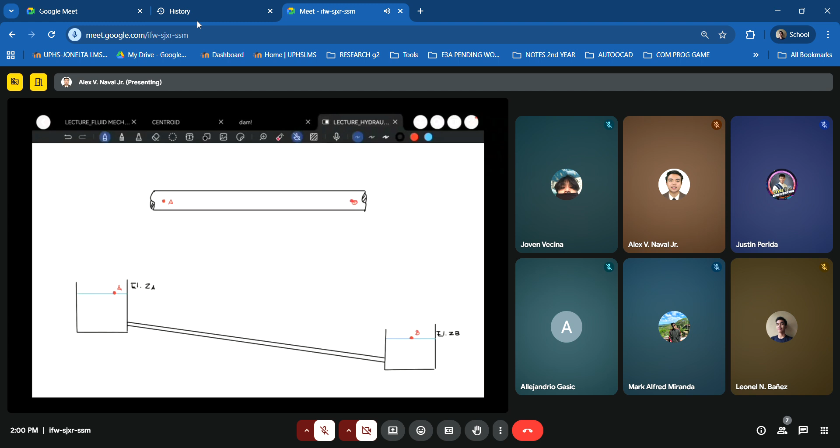Okay, solving reservoir problems. But before that, let's have a quick review of the concept of grade lines, no? Energy grade lines and hydraulic grade line.

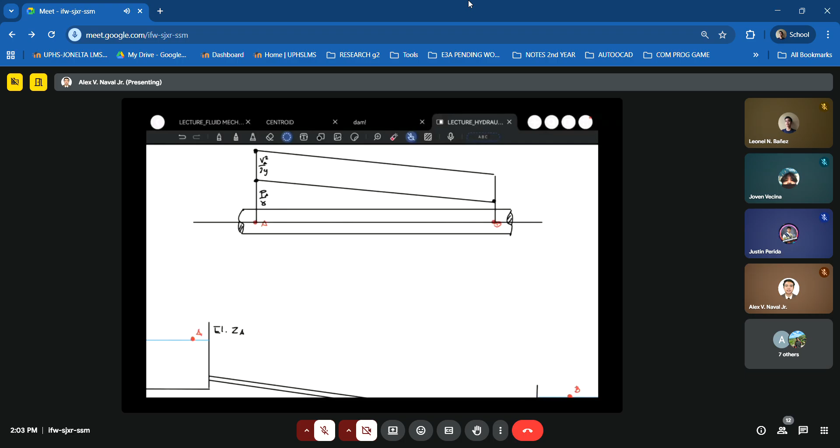So this will be our hydraulic grade line, and this one on top is your energy grade line. Okay, so this is VB squared over 2G, and this one is the pressure head at B over gamma, or the pressure head at point B.

So we calculate head loss here by means of the difference in total energy level. So if we locate that, up to this point, going here, this is your head loss. So that's what we call the head loss.

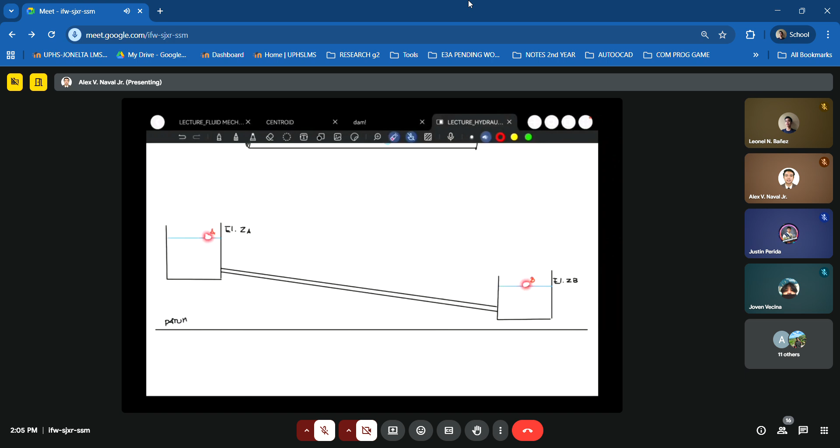Then at point A and point B, that is the elevation of the water surface for each reservoir. So this is reservoir A, this is reservoir B. So if you're going to draw the energy grade line as well as the hydraulic grade line, again,

we need the elevation head. So for the elevation head, the elevation for each point is given. Okay, so let's just connect it from the datum. So this is your ZA, while this one is your ZB.

Then next, we said to draw the energy grade line, we need the elevation head. So in pipes, there was no elevation head because our datum was at the center point of the pipe itself. Then aside from the elevation head, we need the pressure head and velocity head.

But you'll remember, when we talk about reservoirs, because a reservoir is exposed to atmospheric condition, since they're open, open surface, meaning our pressure head here is 0. So if we draw the hydraulic grade line, remember we said hydraulic grade line is just pressure head as well as the elevation head.

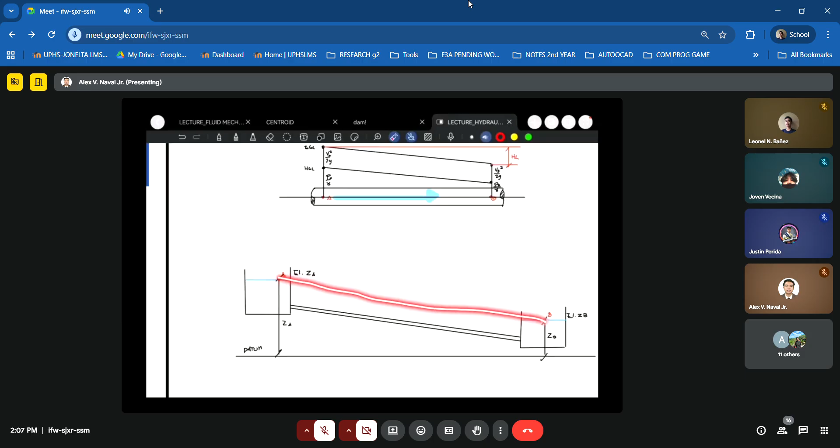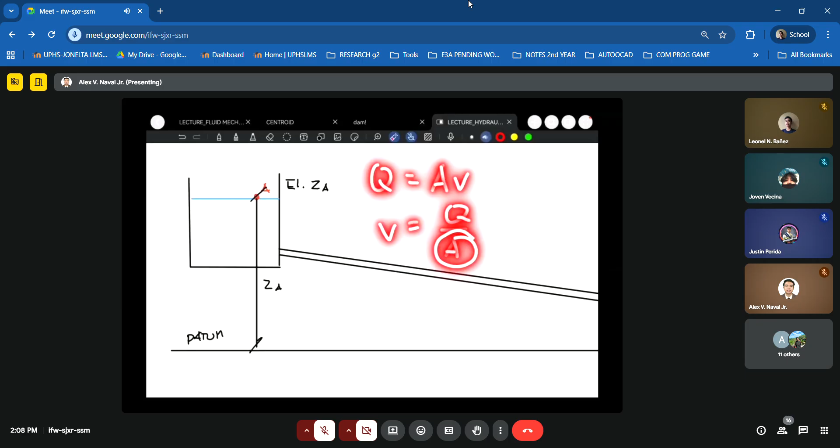So let's go back to the logic of the reservoir. Because this is a reservoir, the velocity head here is 0 because it's negligible. Again, the velocity for a reservoir measures how fast the water level drops. Because that has a large area, Q equals AV, V equals Q over A. Because your area is large, meaning your denominator is high, your velocity would be approximately equal to 0.

As well, if we observe that in real world observation, we don't really see the speed of the drop or rise of the water level or fluid level in reservoirs. So usually it takes time before we see the rise or change in fluid level in our reservoirs. So because of that, we consider velocity approximately equal to 0. So therefore, our velocity head is 0 as well.

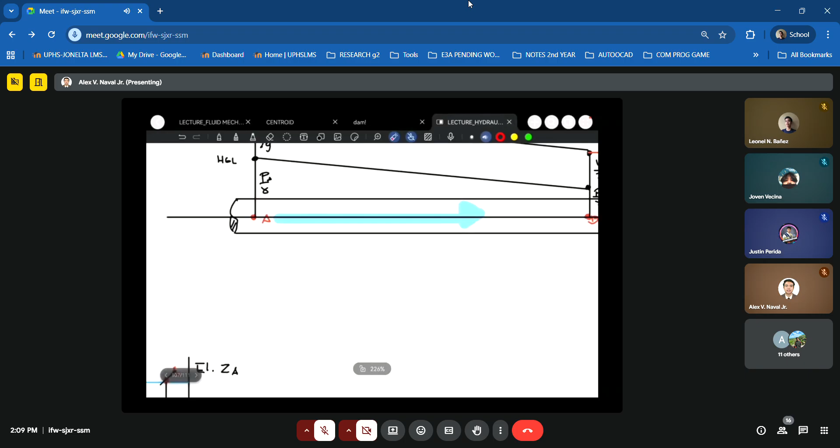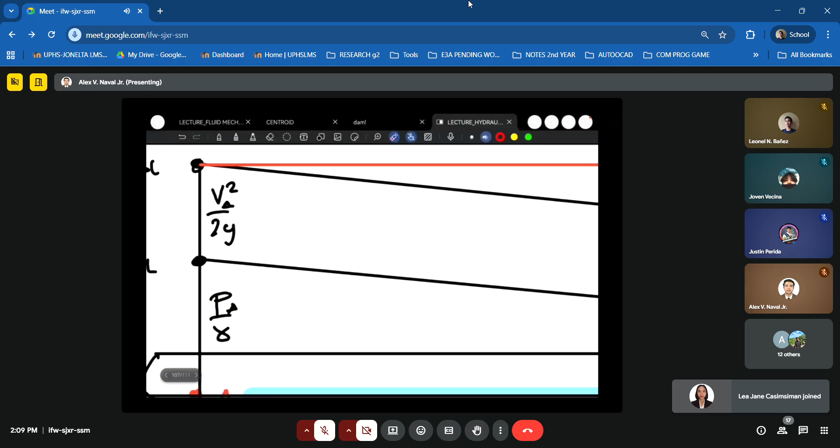Ang velocity mo, say, meron value pero maliit lang, say 0.0001. Sa velocity head, naka-square pa yan, so 0.0001 squared, lalong liliit yung value mo. Tapos i-divide mo pa sa 2G na 19.62. So almost close to 0 talaga ang ating velocity head.

So meaning by that, wala tayong velocity head sa ating grade lines. So kung i-drawing natin ngayon yung energy grade line, yung hydraulic grade line muna tayo. Di ba sabi natin, hydraulic grade line, ito yung point to point ng elevation head plus pressure head. But then again, wala tayong pressure head dito, so elevation head lang yung i-consider natin. Okay? So ito siya, this is our hydraulic grade line.

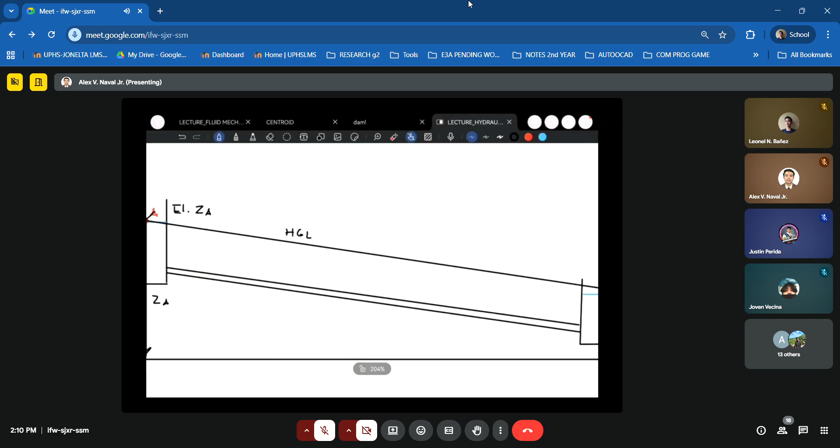Then as for the energy grade line, sabi natin, sukat lang tayo pataas ng velocity head, then nandun natin makikita yung energy grade line. But then again, for this one, sa mga reservoir problems natin, wala tayong velocity head. Therefore, ang HGL natin is also our energy grade line.

Ganun siya, no? So ngayon, locate naman natin ano yung head loss natin dito. So for the head loss, ito lang siya. So ano yung total head na nawala? That is our HL. Now pag-usapan naman natin kung paano kino-compute ang HL sa dalawang figure na to.

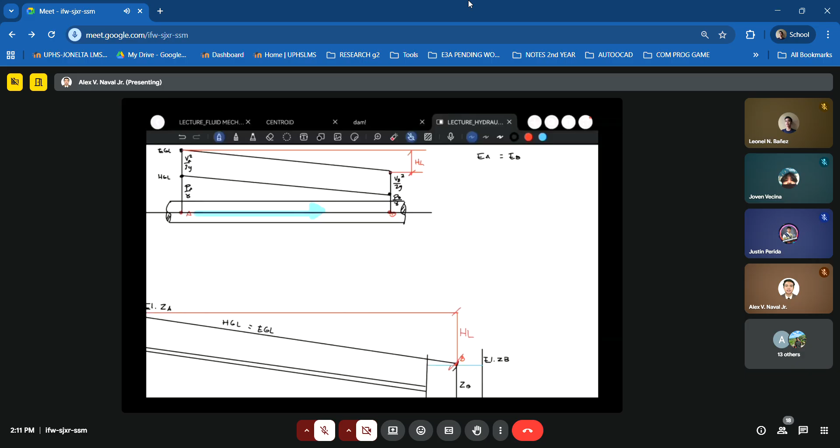Di ba, to solve for the HL, magsisimula tayo dito sa concept ng Bernoulli energy equation na kung saan ang energy at point A equals sa energy at point B. So that is VA squared over 2G plus PA over gamma plus ZA, which is 0 dahil tayo ay nasa datum na mismo yung center line. So equals velocity B squared over 2G for the velocity head at point B, pressure head at point B over gamma, then plus HL. Yun yung ginagawa nating equation for the energy equation.

Okay, so kung HL ang gusto nating isolve, so HL, we can obtain HL by laruin lang natin, so magiging VA squared minus VB squared over 2G, then plus PA minus PB over gamma. So that's how you solve for the total head loss for pipes, kasi mayroong pressure head at velocity head.

What if, di pa yan natin nasama dito si ZB? But then again, 0 rin yan.

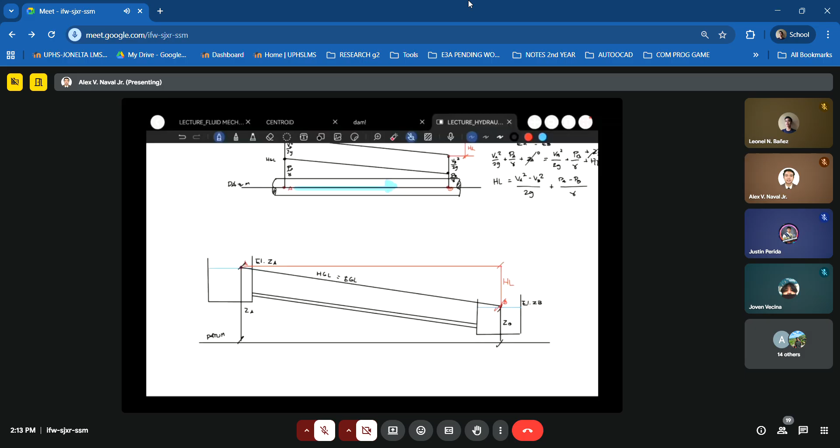Okay, so but what if sa reservoir naman tayo? Sa pipes kasi, meron tayong pressure head at velocity head. Sa reservoir naman, wala. Ang tanging meron tayo ay elevation head. Okay? So kung itatry natin isolve yung head loss sa reservoir A to reservoir B.

So again, let's start with the energy equation. Energy at point A equals energy at point B. Okay, so velocity head is 0. So VA squared over 2G, 0. Pressure head is 0 as well, plus ZA. So given ang elevation ng point A equals, may head loss tayo dito.

So dagdag natin dito yung head loss plus HL, kasi yung EB, energy at point B, ito lang yung tinutukoy doon. So last dito. Okay, so ito yung energy at point B, ito yung energy at point A. Okay, so energy at B naman, velocity is 0, as well as also the pressure head ng 0 rin. Then plus ZB, meron tayong elevation head for that.

Then plus HL. So meaning to say, to solve for HL, to solve for the head loss, this is simply the difference in elevation of point A and point B. So ganun siya sinosolve. Yung head loss sa mga reservoir problems is just a matter of the difference of elevation. Walang involved dito na velocity head at pressure head.

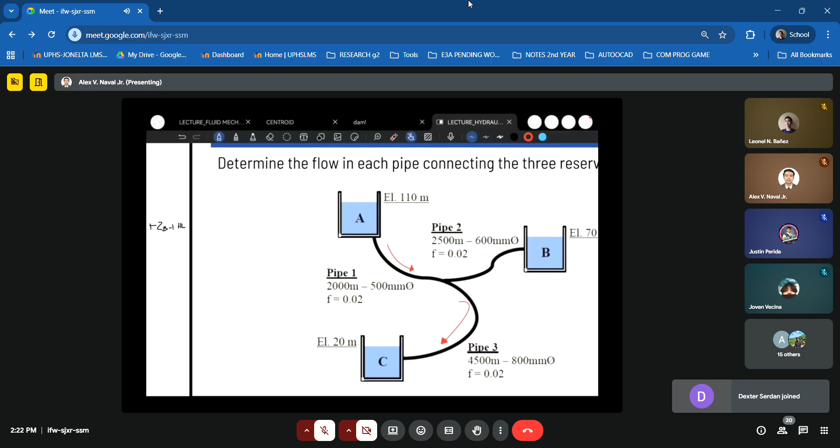Okay, so once we determine that flow, the direction of flow for Q1, the direction of flow for Q3, the discharge at pipe 3, next is to determine the direction of flow for pipe 2, whether it's going towards Reservoir B or going out of Reservoir B. So we're not sure, we can't tell because it's just in the middle.

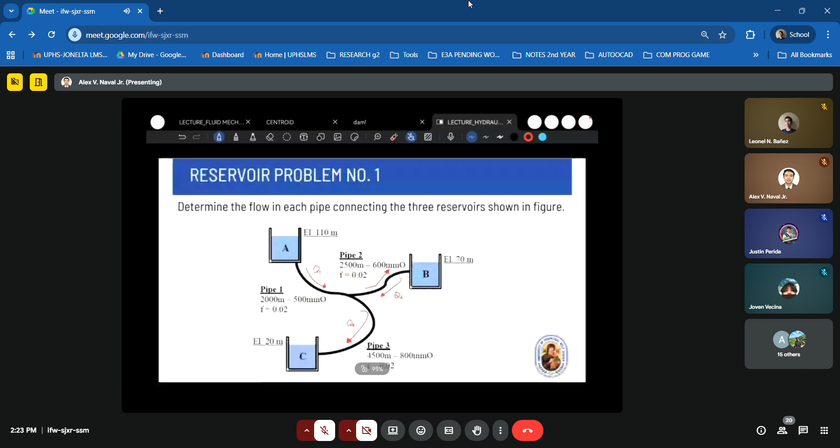Okay, so ang gagawin natin dito ay mag-a-assume. I-assume natin na walang discharge na nagaganap for Q2.

Para ma-determine ang direction ng flow ng Q2, i-assume natin na walang discharge sa Q2, meaning patay yung pipe natin dyan. Kung walang discharge dyan, ibig sabihin walang head loss, kasi nakadepende ang head loss sa discharge. Kung babalikan niyo yung mga formula, sa kaliwa may head loss, sa kanan may discharge.

Okay, so once siniro natin ang Q2, alamin natin ang Q1 at Q3 kung magbabalance out. So kapag ang lumabas ay mas malaki si Q1 compare sa Q3, ibig sabihin merong katulong si Q1.

Ay, baliktad pala. So kapag ang case natin is Q1 greater than Q3, kunwari ang discharge natin dito is 10 meter cube per second, tapos dito ay 5 meter cube per second. So malamang merong katulong si reservoir A, tatanggap si reservoir B, no? Kasi hindi pwedeng 10 meter cube per second doon, tapos dito ay 5 meter cube per second. Malamang dito ay merong 5 meter cube per second din, para sila ay mag-balance out. So ito ay magsusupply, ito ay tatanggap, ito rin ay tatanggap. That is when Q1 is greater than Q3.

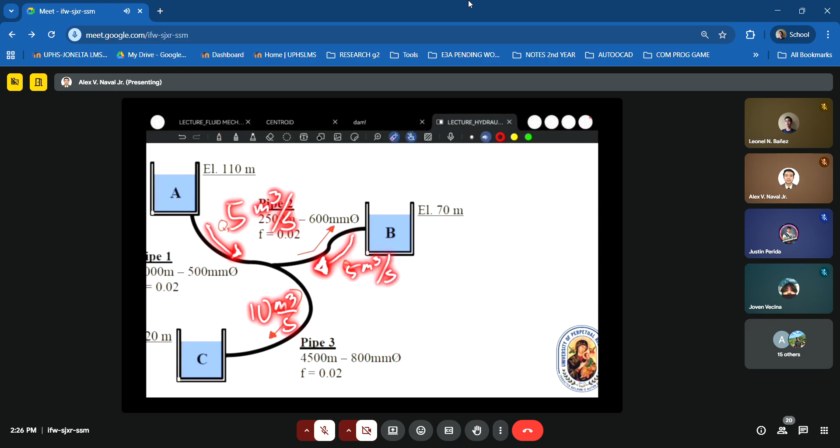Pero what if naman Q1 is less than Q3? Ang nangyayari doon, say for example 5 meter cube per second to, tapos ito ay 10 meter cube per second para sa Q3. So ano ibig sabihin nun? Hindi sapat yung 5 meter cube per second ng Q1, kaya kailangan niya pa ng tulong ng Q2 na another 5 meter cube per second, para maging 10 sa pagdating ng Q3.

Okay, so with that, kapag Q1 is less than Q3, ibig sabihin ang Q2 ay magsusupply. Kapag Q1 is greater than Q3, ibig sabihin ang Q2 ay tatanggap siya ng tubig papuntang Reservoir B from Reservoir A. So ganun yung logic dito. Kaya ang gagawin natin, i-assume natin na ito ay 0 at i-compare natin ano ang magiging discharge for Q1 and Q3 once siniro out natin ang Q2.

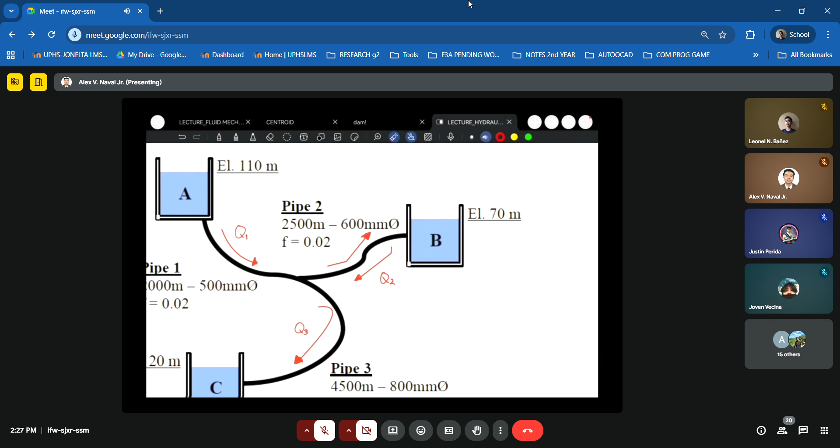So kapag ginawa nating 0 ang Q2, ibig sabihin magiging 0 ang head loss. Ano ibig sabihin nun? Kapag 0 ang head loss, ang mangyayari doon basically ay magpapantay yung energy grade line natin. Dito, yung head loss may value, kaya slanted or inclined yung ating energy grade line. Pero kapag ito ang energy grade line dito, ibig sabihin walang head loss, kasi horizontal line lang siya. So kung walang head loss, dapat pantay lang sila. Ang mangyayari doon, ang logic doon is that...

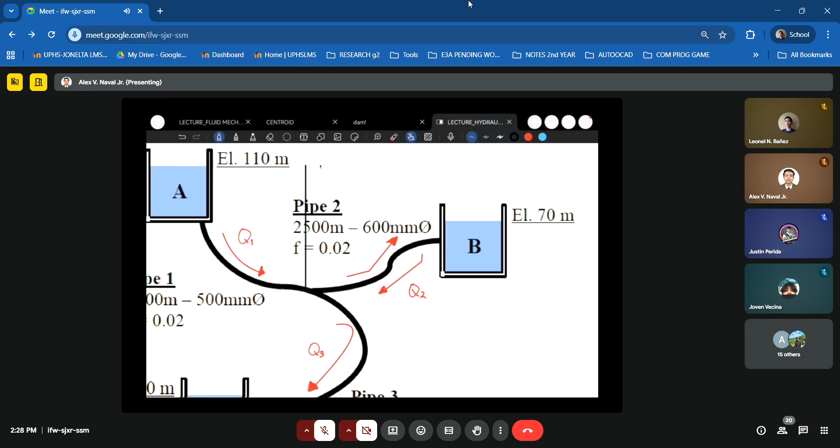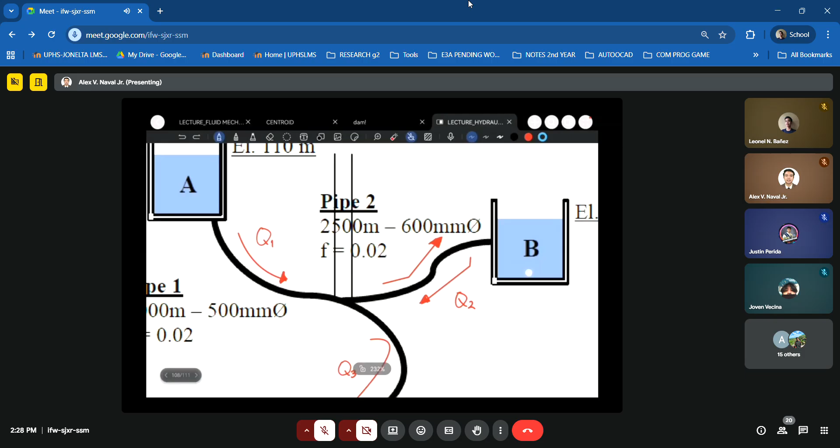Mag-i-imagine tayo dito ng piezometer, no? Maglalagay tayo dyan basically ng tubo dun sa junction. Imagine dun sa junction ng pipe 1, pipe 2, at pipe 3, naglagay tayo ng tubo. Dahil naglagay tayo dun ng tubo, ang tendency niyan ay merong tataas na tubig. At yun ay ipapantay lang natin sa reservoir B. Dahil sabi natin, 0 ang head loss from point B papunta sa junction, isi-0 natin or ipapantay natin ang ating energy level. Magiging ganito ang fluid level.

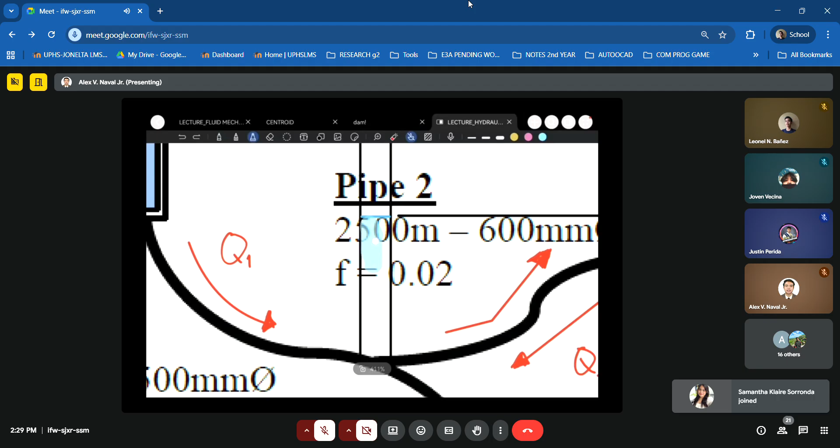Okay, so ayan yung concept mo. Ginawa natin yan para makuha ang Q1 at Q3. So paano natin yun kukunin? Ayusin lang muna natin yung drawing.

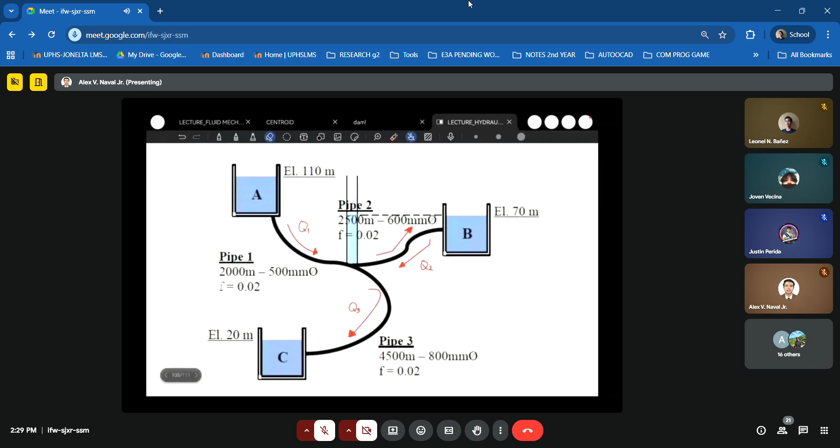Okay, so kunin natin yung Q1 at Q3, at makukuha natin ang Q1 at Q3 by relating the head loss for pipe 1 at head loss for pipe 3. So again, nag-assume tayo na pantay lang ang level dito sa junction, pantay sa elevation ng reservoir B. So solve natin, or identifying muna natin yung mga head losses natin.

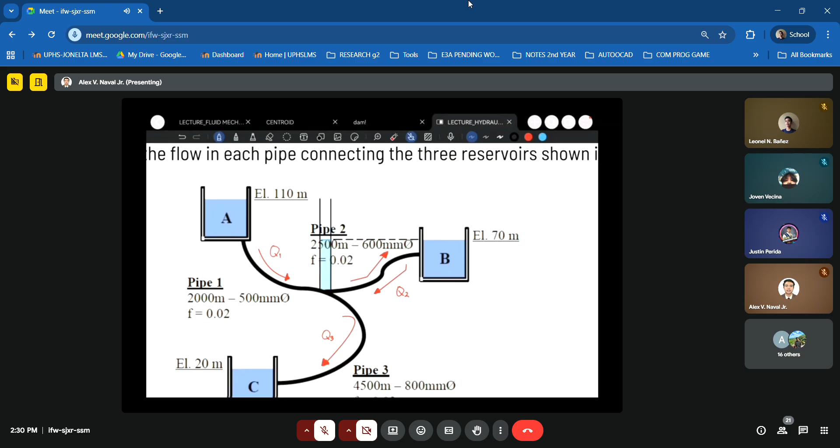So based sa figure, kung i-connect natin si point A sa junction, kung i-drawing natin yung energy grade line para dito, pag ganito lang siya, pag ganyan lang siya. Kasi nga, pinag-uusapan na lang natin dito ay elevation head, for reservoir problem. Walang involved na pressure head at velocity head. So connect the dots na lang sa water surface ang ating energy grade line.

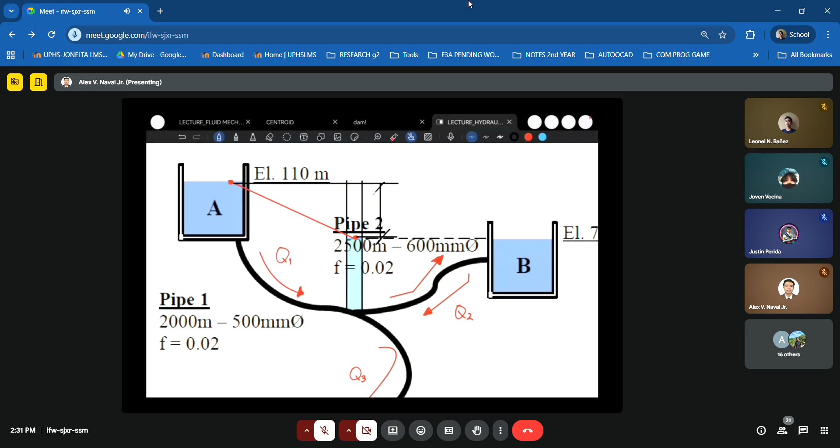So to solve for the head loss of this one, sukatin lang natin yung basically yung difference ng elevation na ito. This is for pipe 1 papunta sa junction. Ang difference nila is the head loss. Ang head loss dito, tawagin natin HF1. HF1 which is equal sa difference in elevation ng point A at ng junction. So sabi natin, ang elevation ng junction ay pantay lang sa reservoir B. So...

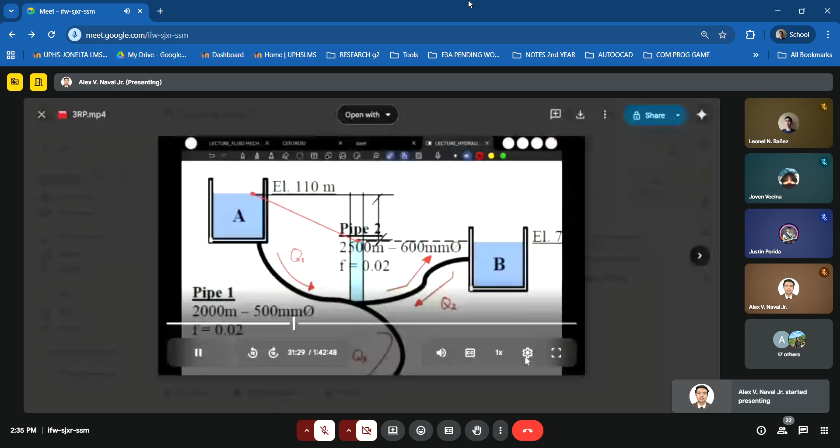This is for pipe 1 papunta sa junction. Ang difference nila is the head loss. Ang head loss dito, tawagin natin HF1. HF1 which is equal sa difference in elevation ng point A at ng junction. Sabi natin, ang elevation ng junction ay pantay lang sa reservoir B. So that is difference ng 110 minus 70. So that is 40 meters.

Okay, so next, HF3 naman ang pag-usapan natin. So kung i-connect ulit natin ang energy grade line, drawing natin, magiging ganito siya, no? Kung the water surface level ng reservoir C papunta sa water surface level ng junction.

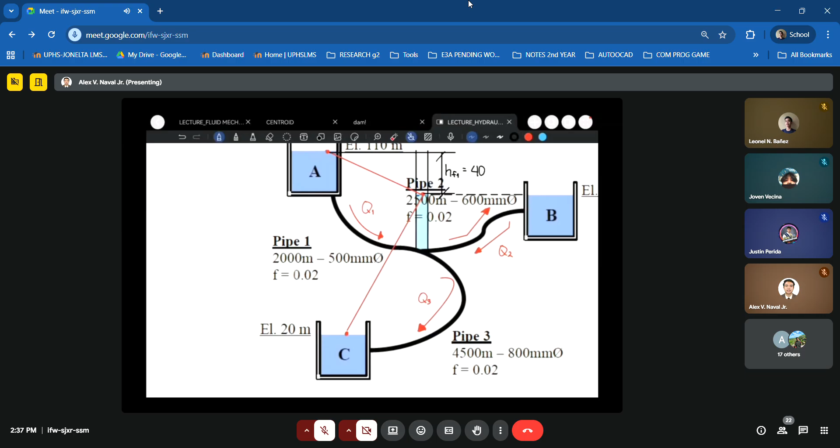Okay, at ang ating head loss dito, mula junction papunta sa reservoir C, tatawagin natin yung HF3. HF3 na equal sa difference in elevation ulit ng ating junction at ng reservoir C.

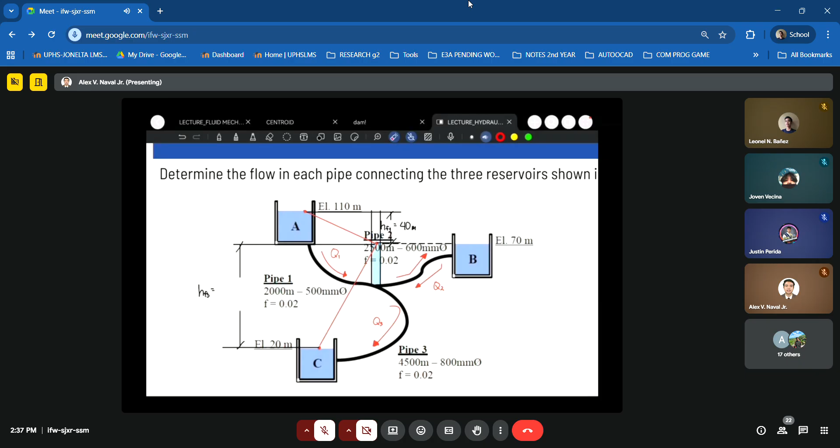Okay, so kung ang ating junction ay may elevation same sa B which is 70, at ang reservoir C natin ay may elevation 20 meters. So ang head loss natin dito is simply 70 minus 20 lamang or 50 meters. This is 50 meters.

Okay, so if that's the case, alam na natin ang HF1 at HF3. Now we can now solve for the value of Q1 at Q3 gamit ang HF1, or ang formula muna natin ng Darcy-Weisbach na equation. So that is HL equals 0.0826 FL Q squared over D raised to 5.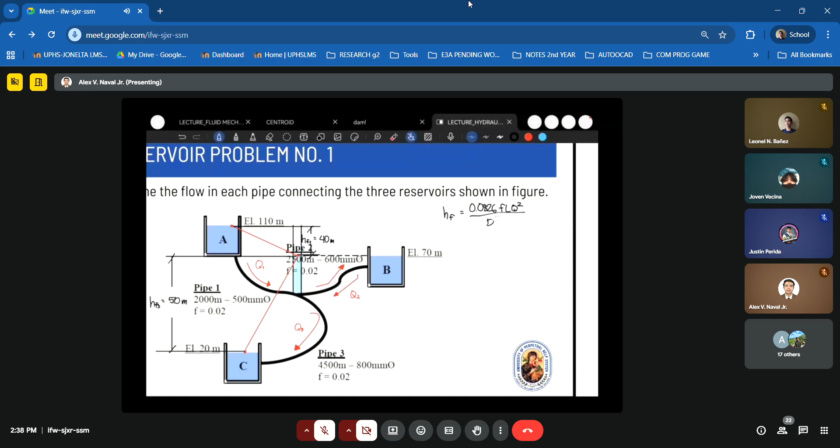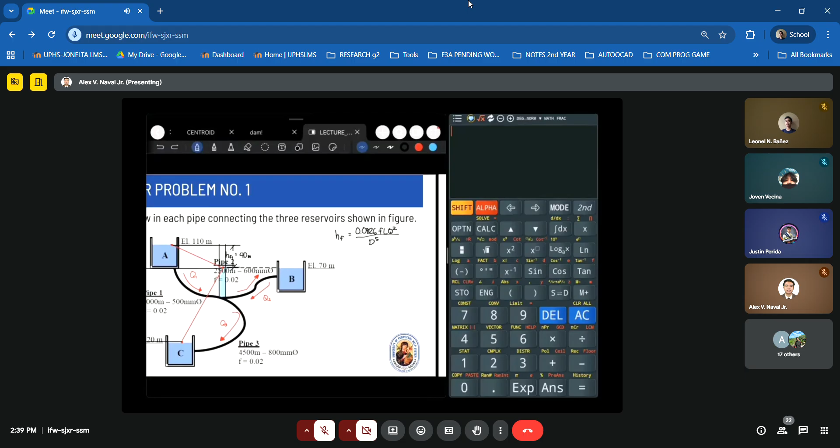So kung HF1 ang pinag-uusapan natin, equal na lang yan sa irerekta na natin. Sige na, sulat ko na. HF1 equals 0.0826. Yung F natin ay 0.02. And ang length ng pipe 1 natin, ang length ng pipe 1 is 2,000.

2,000, then Q1 squared ay hindi natin alam. And for the diameter is 500 mm or 0.5 meters. Then sabi natin ang HF1 natin ay equal sa 40 meters.

So with this equation, masasolve natin ang Q1. So 40 equals 0.0826 times 0.02 times 2,000 times Q1 squared over, yung raised to 5, nalimutan ko, 0.5 raised to 5.

So ang value ng ating Q1 would be equal sa 0.615 cubic meter.

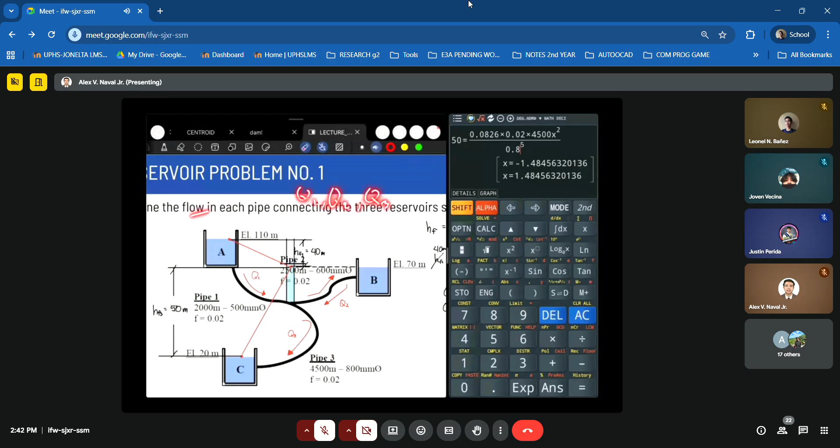Kasi ang tanong nga natin dito, di ba? Determine the flow in each pipe. So Q1, Q2, and Q3 yung gusto nating makuha. But then again, itong Q1 at Q3 ay hindi pa final answer kasi ginagamit pa lang natin to determine the case kung si reservoir B ba ay tumatanggap or nagsusupply.

Okay, so based dito sa nakuha nating values, then Q2 is 0. Nalaman natin na Q1 is less than Q3. So ano ibig sabihin nun? Kung may 0.615 dito, imagine mo para mas make sense. Kung dito ay 0.615 at sa kabila ay 1.48. Ito ay 0.615. Hindi equal, no?

Hindi equal yung binibigay ng Q1 para matanggap ni Q3 yung 1.48 na discharge. Kung hindi balanse, ibig sabihin may katulong dapat si pipe 1 na magbibigay ng discharge para ma-achieve ni pipe 3 yung 1.48 at ito 0.615. So basically ito 1.48 minus 0.615 dapat, no?

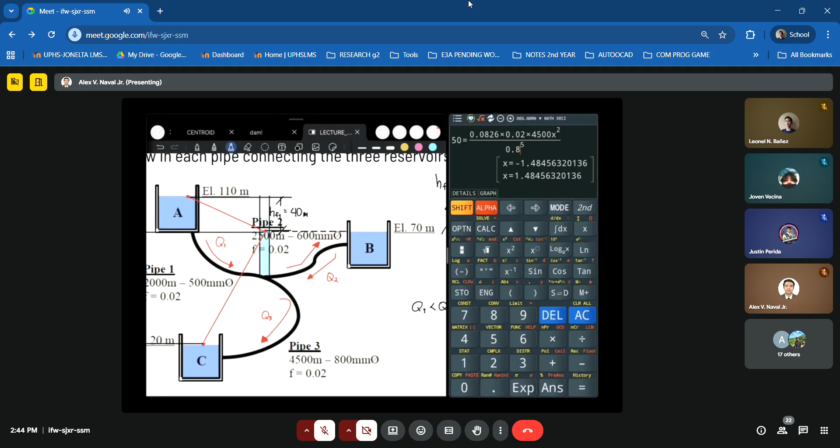Ayun sana, pero again, hindi pa yun yung final answer kasi nag-assume pa lang tayo dito. Ang goal lang nun is to determine the type of flow, no? The direction of flow. Dahil nga based dito sa conclusion natin, Q1 is less than Q3, ibig sabihin may katulong si pipe 1 para mag-supply kay reservoir C, and that is reservoir B. So ito yung tamang flow natin.

Nagsusupply din si reservoir B. Okay, so dahil alam na natin na si reservoir B ay magsusupply, let's now solve for the proper answer, no? Proper answers ng Q1, Q2, and Q3.

Okay, so dito tayo using same figure. I-drawing na ulit natin yung tubo sa junction or the piezometer. Okay, ulit tayo dito ng tubo sa ating junction. Importante na nilalagay natin ito, no? Kasi dito tayo nagsusukat ng head loss sa junction, no? Okay, so sabi natin ang flow would be in this manner, no? Yung Q1 ay pag ganito. This is your Q1 and this is your Q3.

Okay, so for Q2 naman, the discharge at pipe 2, sabi natin, palayo sa reservoir B, no? Kasi siya ay magsusupply. So, this will be our Q2.

At based dito, sa logic na to, madedetermine natin kung nasaan banda ang level ng fluid dito sa tube sa junction natin or sa piezometer natin. Okay, so sabi natin, yung logic kanina, kapag nagsusupply, mas mataas ang energy compare dun sa sinusuplayan. Now, based dito sa figure, si reservoir B ay nagsusupply sa junction na ito. So, ano ibig sabihin nun? Dapat yung fluid dito sa junction is mas mababa compare sa reservoir B.

So, with that, let's draw the estimated na fluid level. So, sabihin natin nandito banda, mas mababa siya compare sa reservoir B. Okay?

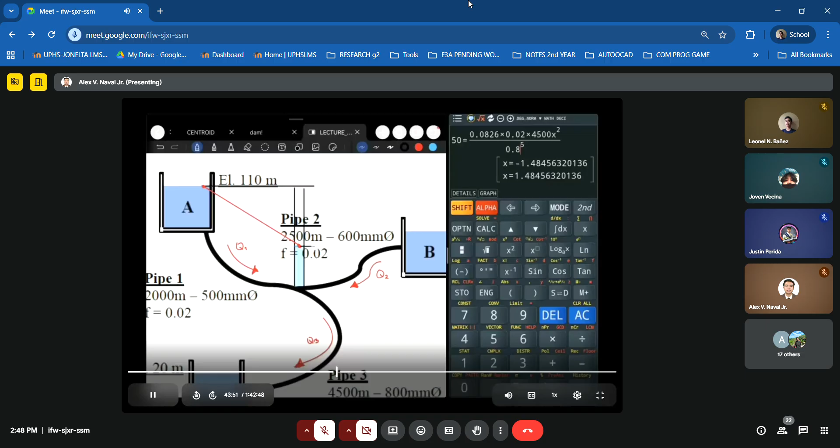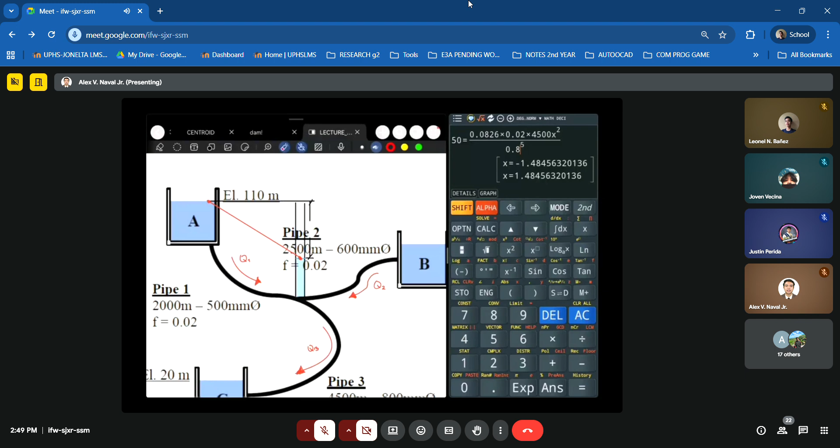So, eto na ang ating head loss for pipe 1, and that is equal to what? So, kung kanina sinukat natin ang head loss 110 minus 70 kasi ito ay pantay lang ng reservoir B. Ngayon, hindi na ganoon, no? Siya ay bumaba na. So, mas mababa na siya sa 70 meters. Yung elevation natin dito, well, hindi natin alam, no? So, hindi tayo makakapag-direkta na 110 minus the elevation of this one. So, since hindi natin alam yun, tawagin na lang natin x yan, no?

So, sabihin na lang natin ito ay x. Okay? So, HF1 natin bale ay equal sa x. Now, let's solve for HF2 naman based sa figure. So, again, connect the dots.

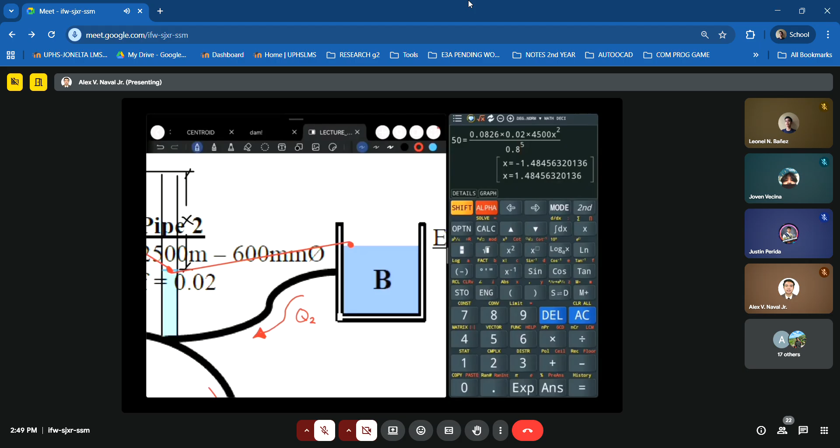So, with that, malalaman natin ang HF2 would be this one. Yung difference in elevation ng reservoir B papunta sa elevation ng junction.

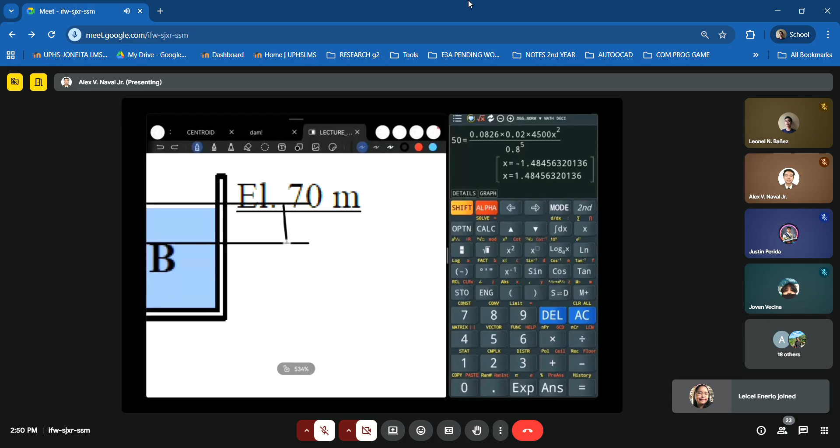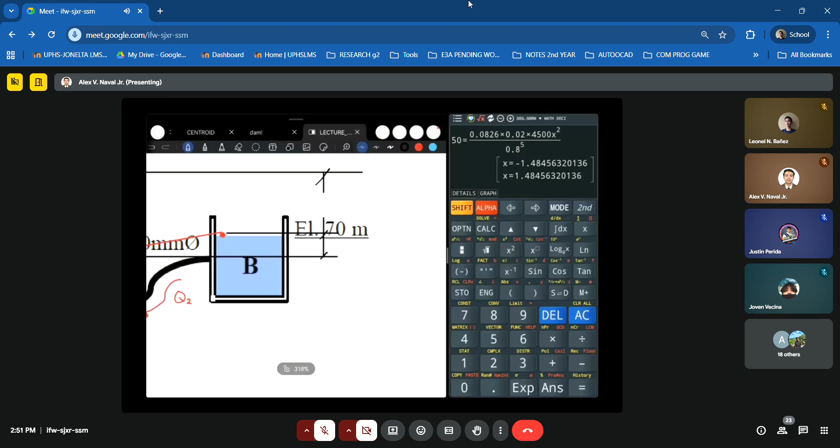Okay, so paano natin susukatin yan? So, if this is x, ilan to? Okay, so let's use the elevation, no? So sabi natin, kung titingnan natin yung elevation, kung ito ay 110 at itong nasa baba niya ay 70 ang elevation, ibig sabihin, masusukat natin kung ilan to. This is simply 110 minus 70. So this is 40 meters, no?

Okay, so nagets ba yan? Kung ito ay 110, ito ay 70. So this is 40 meters. Pero again, ang gusto natin is ito, no? Pero tandaan ninyo, meron tayong sukat dito and that is x. So what do we mean by that? X equals 40 minus HF2. So, ang HF2 natin would be equal sa 40 minus X.

Okay? So, X minus 40 pala. So, bali, base dito, no? Ang X natin equals sa 40 plus HF2. Kasi ito si HF2, no? Itong X equal dito sa 40 plus HF2. So, ibig sabihin, ang HF2 natin would be X minus 40. Okay, so X minus 40. Palitan na lang natin itong X minus 40.

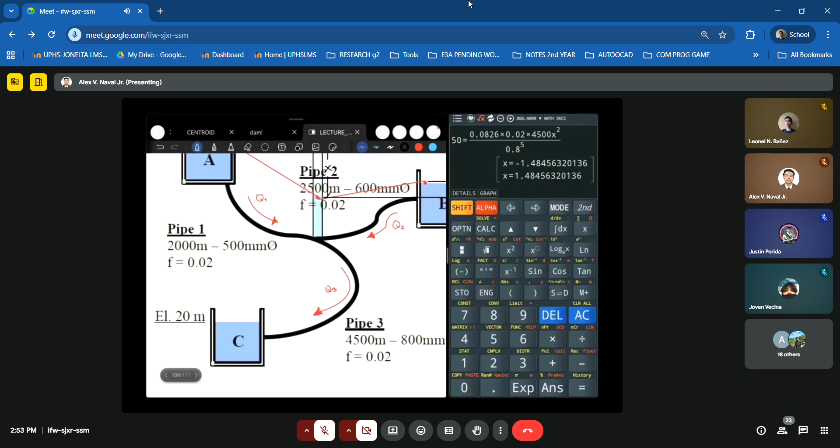Okay, so next naman is HF3. HF3, ganun ulit, connect the dots. Then, sukatin natin ang difference in elevation. Difference ng elevation, this one. Elevation ng junction minus elevation 20 meters ng Reservoir C. Okay, so paano natin yan i-define? Okay, so tingnan natin yung meron tayong given, no?

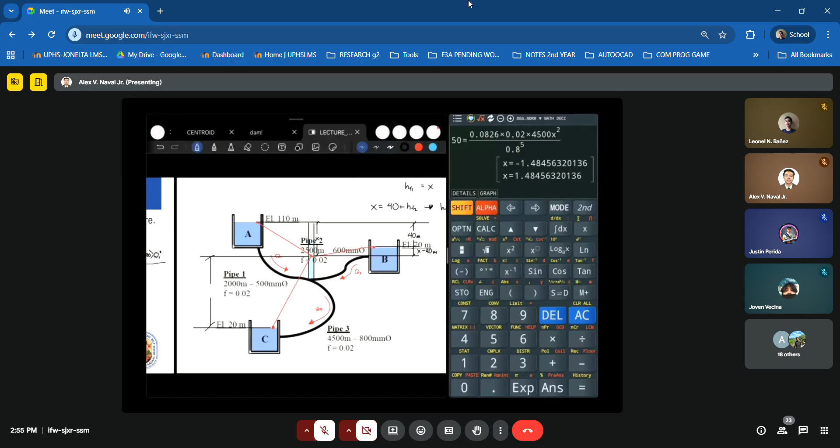So sabi natin ito ay 110, sabi natin ito ay 20. So basically ito ay equal sa 110 minus 20, which is 90. Okay, so tandaan nyo, kung ito ay 90 at ito ay x, meaning bawasin lang natin ang x sa 90, ang matitira ay ito, no? So basically ito ay 90 minus x. Okay, again, this is 90, this is x. Now ito 90 minus x na yan. Okay, so lagay na natin ang HF3 ay equal sa 90 minus x. HF3 equals 90 minus x.

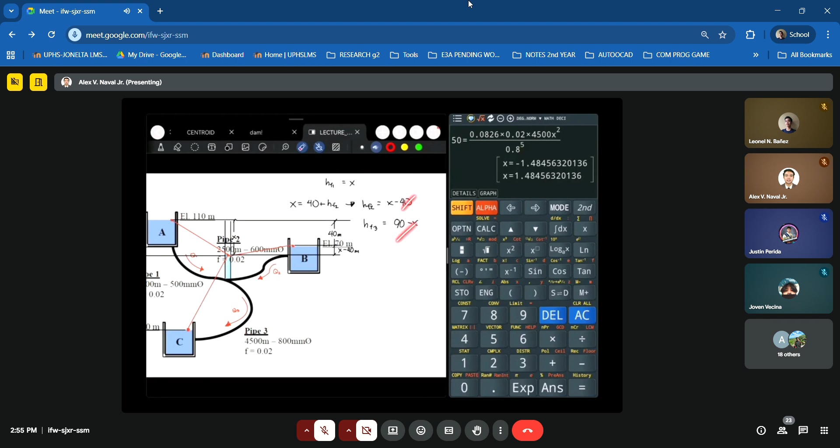Okay? So, now that we know the value of the head loss for each pipe na, no, in terms of x na, kung mapapansin ninyo, HF1 is in terms of x, HF2 is in terms of x, HF3 is in terms of x. So, goods na yan. After yan, let's define what the HF1, HF2, and HF3 is in terms of Q naman.

So, in terms of Q, gamit naman tayo headloss formula using Darcy-Weisbach. Okay, so HF1 equals 0.0826, F is 0.02, L is 2,000. Then, ito ay Q1 squared. Okay? Over D raised to 5, ang D is 0.5 meters raised to 5. So, ayan.

Okay, so we said that HF1 is equal to X. Next, let's move to HF2.

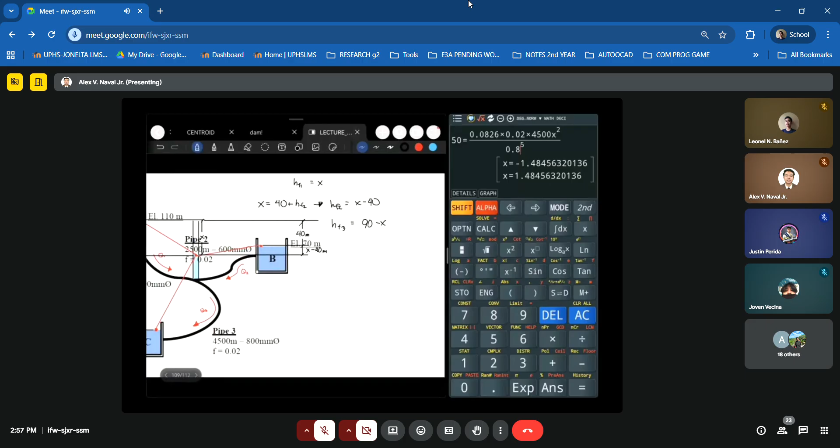HF2 is 0.0826, F is 0.02, length is 2,500, then Q2 squared over diameter, which is 600 millimeters, so this is 0.6 raised to 5. We said HF2 is equal to X minus 40.

Okay, next HF3. 0.0826 times 0.02, then our length and diameter: 4,500 Q3 squared over 0.8 raised to 5. Then this equals 90 minus X. Okay, so that's it, solve it.

Then after that, to determine the value of Q1, Q2, and Q3, let's look at the equations - this and this. Let's relate Q and X. Earlier, what we did was relate HF1 to X. Next, what we did was relate head loss to Q. Next, we relate Q to X.

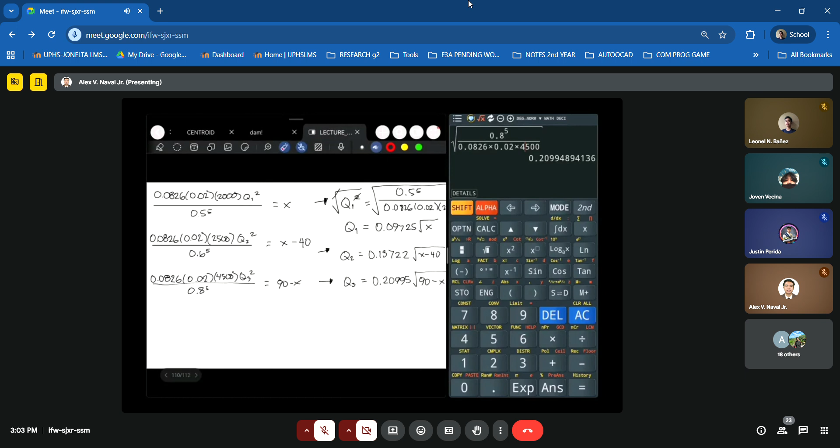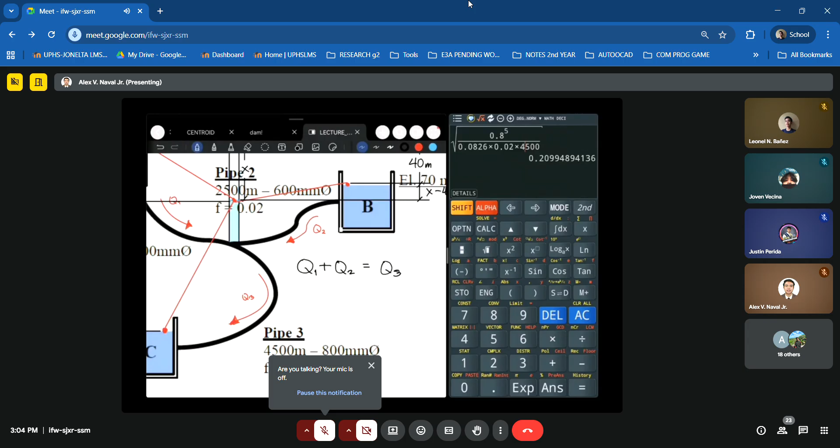So using these equations, we can determine the value of X by means of the analysis of the direction of flow. Remember we said earlier that Q1 is less than Q3, so we determined that Q2 helps supply enough strength for Q3, since Q1 alone isn't sufficient. So with that, we can create an equation based on the direction of flow: Q1 joins forces with Q2 to form Q3. So our equation would be Q1 plus Q2 equals Q3.

Okay, so using that, Q1 plus Q2 equals Q3. Let's substitute what Q1, Q2, and Q3 are in terms of X. Okay, using the calculator: Q1 is 0.09725 square root of X, plus Q2, which is 0.13722 square root of X minus 40, then equals Q3, which is 0.20995 square root of 90 minus X.

So let's shift-solve. There should be none... What's this? So try it on your calculator too while I retype our inputs. Again: 0.09725 square root of X plus 0.13722 square root of X minus 40 equals 0.20995 square root of 90 minus X. Shoot, solve - no solution again. This calculator is acting up again. I still can't figure out what's wrong with this calculator on the tablet. But I'm sure there's an answer. Try it on your own calculator.

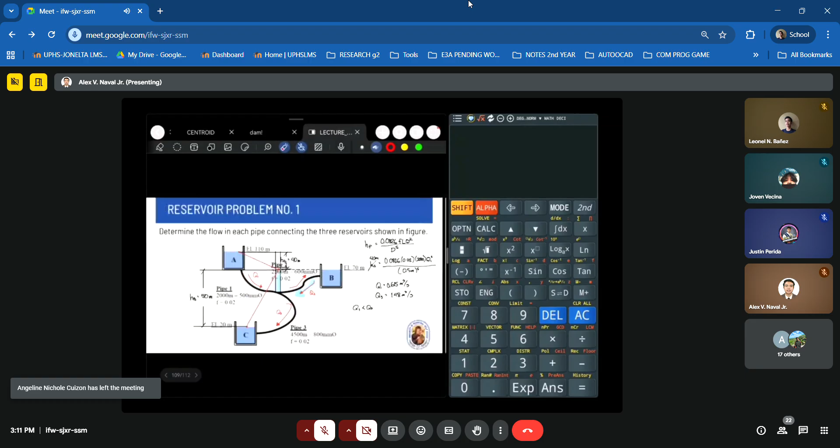Okay, so we're done solving the first sample problem under 3 reservoir problem, no? So, na-compute natin kung gaano kalakas ang flow rate na tumatakbo sa pipe 1, pipe 2, at pipe 3. So, let's move on to the next problem.

We have here a reservoir at A, which is the source of water supply, having an elevation of 150 meters. Then at B, there is a junction with elevation 72 meters. Then at point C and point D, there is a town with elevation 31 meters and elevation 15 meters respectively. Now, the pipes connecting those towns from the reservoir has a length of AB, 15,000 meters.

Length ng pipe BC is 9,200 meters. Length ng BD is 6,100 meters. Given then ang diameters for each pipe, 350 mm, 220 mm, and 200 mm for pipes BD. Okay, given din ang friction factor. So, meaning gagamit ulit tayo dito ng Darcy-Weisbach equation, which is yung 0.0826 FLQ squared over D raised to 5 na formula for the head loss.

Now, ang problem dito is i-determine daw natin yung number of inhabitants sa town C and town D. Kung given ang consumption ng bawat tao bawat araw, so ito 150 liters daw per day per person. So ibig sabihin sa isang araw, ang isang tao raw ay nagko-consume ng 150 liters. That is the average consumption na pinapagamit sa atin.

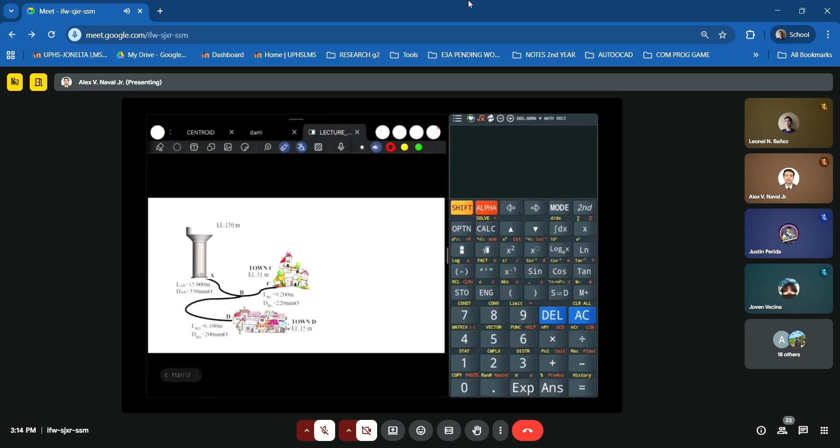So basically 150 liters per capita per day, meaning meron yung 0.15 cubic meter per person per day. Okay, so magka-cancel dito yung unit of volume, unit of time, at ang makukuha natin yung person, no? Yung meter cube per second magka-cancel. Si second, syempre, co-convert natin in according to the unit of day. Okay, so let's solve this having this figure which is described dun sa worded problem natin.

Okay, so again, first thing to do is to determine the direction of the flow, kagaya ng ginawa natin sa sample problem number 1. So alam natin na si Reservoir A ay elevation 150 meters, siya ang may pinakamataas na elevation. So tendency niyan, siya ang magsusupply ng tubig. Okay? Then alam natin si town D ang pinakamababa with elevation 15 meters.

Meaning to say, si town D ay magre-receive ng tubig. Okay? So now, ito yung catch dito. Pagdating sa town C, which is dun sa gitna lang ng Reservoir A at town D, hindi na natin kailangan pag-isipan kung ano ba ang direction ng flow na to. Hindi kagaya nung first example natin na dinetermine muna natin kung anong direction ng flow ng tubig dun sa pipe at reservoir B dun sa gitna, no.

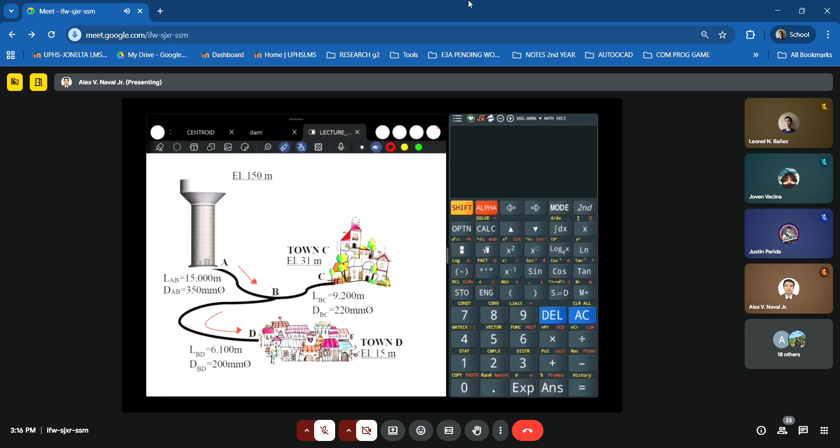Dito kasi town C at the same time dinescribe din naman si problem na ang setup is we have a reservoir. Ang purpose ng reservoir is to deliver water, to store water and deliver those waters to the corresponding town. So, town C and town D. So, wag na natin pag-isipan yan. Automatic yan ay magre-receive ng tubig.

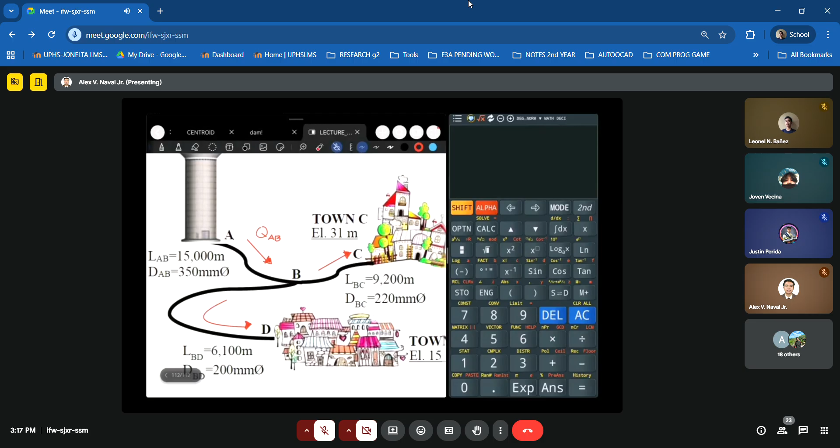Okay? So, tandaan ha, hindi naman pwedeng mag-supply ng tubig yan kasi town yan. Ang isusupply lang yan dumi, no? Hindi naman para isupply yan. Okay, so again, magre-receive ng tubig si town C. Okay, so with that, pangalanan natin yung mga discharge na involved. So tawagin natin tong Q at pipe AB, and this one would be our Q at pipe BC, and this one would be our Q at pipe BD. Okay.

Okay, so next, let's draw the piezometer sa junction B natin. Basically tubo lang naman yan. Once nag-drawing tayo dito ng tubo, mayroong level of water na aangat dyan.

So yung level of water na yun, di ba sabi natin kapag nagsusupply, mas mataas ang energy grade line nito. Ibig sabihin, kung nagsusupply siya sa point C or sa town C, dapat mas mataas siya sa elevation 31 meters. Ilagay natin siya sa gitna ng 150 at gitna ng 31 meters. Lagay tayo dito ng level of water.

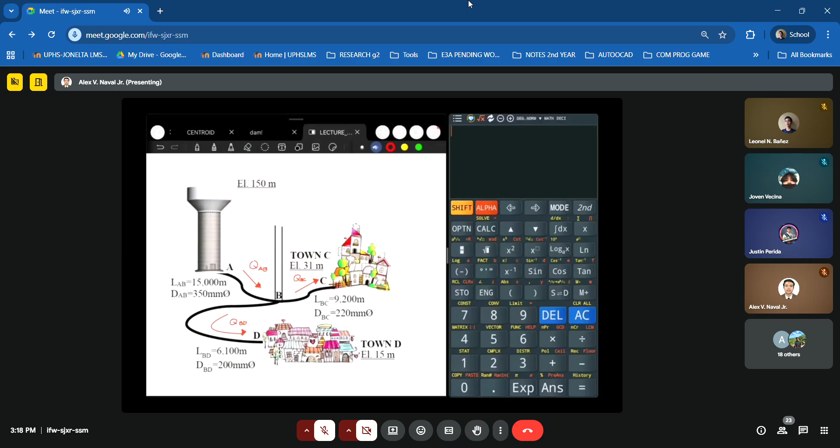Tabihin natin ito, tapos kulayan na lang natin. Okay, so yan.

The next, let's measure the head loss involved in this setup. So we have here elevation 150 meters papunta sa junction. Then we have here elevation 31 meters. Then for D, we have elevation 15 meters. Okay, ito na lang.

Then let's connect the dots. Next, ito naman. Then, ito naman. Okay, then next, let's measure the head loss. So sukat nito, papunta dito. That would be our head loss for pipe AB.

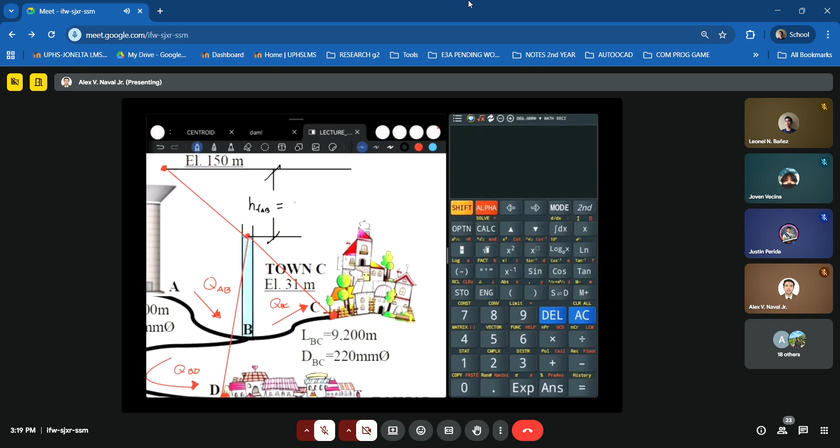Okay, tawagin natin tong HF ng pipe AB, which is unknown. Tawagin na rin natin X na lang.

Next, let's determine the head loss at pipe BC. So the head loss at pipe BC would be this one. Papunta dito. So ilan yan? So ito masusukat natin to.

Kasi kung ito ay 150 meters at ito ay 31 meters, basically ito ay difference lang ng 150 minus 31, which is... ay hindi, 119 lang pala. 119, okay tama ba? So kung ito ay 119 at ito ay X, ibig sabihin ito would be our 119 minus x. Pangalanan natin ang head loss na ito bilang 119 minus x.

Lista na lang din natin. So again, for pipe 1 or the pipe AB, the head loss for that pipe is equal sa x. Then ang head loss naman natin for pipe BC would be equal sa 119 minus x.

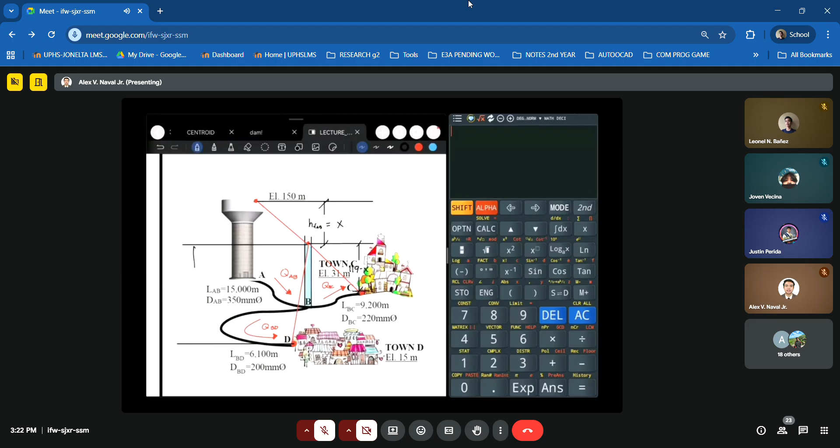135 to, ito ay x, meaning ito ay 135 minus x. Okay, sukatin natin yun. So this is 135 minus x. Okay, so our HF at pipe 3 or pipe BD would be 135 minus x. Okay, so ano nga ulit ang gagawin natin after that?

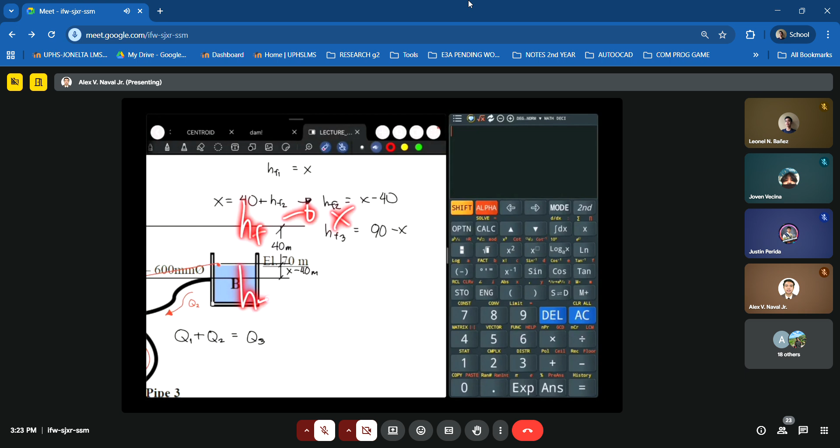So gaya lang ng process kanina. After natin ma-determine yung relationship ng head loss sa x, determine naman natin yung relationship ng head loss sa Q naman. So using the Darcy-Weisbach formula, HF equals 0.0826. So let's solve for the Q in terms of X.

Okay, starting with relating HF to Q. So HF at AB equals 0.0826 times ang ating friction factor ay 0.02 for all pipes. Then, ang length ng AB natin would be 15,000 meters. Then Q squared, QAB squared all over D, the diameter at pipe AB is equal to 350 millimeter or basically 0.35 meter. Then huwag kalimutan raised to 5. Again, our HFAB is also equal sa X.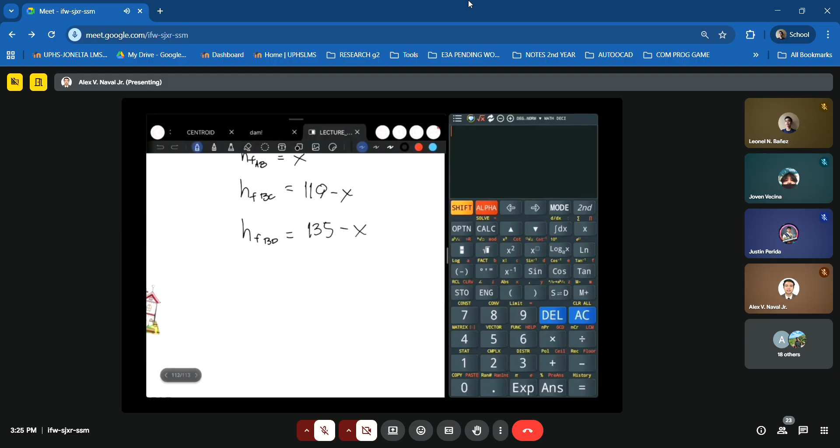The next, for pipe BC naman tayo, solving the head loss at pipe BC, this is 0.0826, 0.02 Darcy friction factor for all pipes, times the length of pipe BC, which is 9,200. Then Q at pipe BC squared all over the diameter of pipe BC, which is 220, so 0.22 meters raised to 5. Again, ang ating head loss at pipe BC is equal to 119 minus x. So let's equate this to 119 minus x.

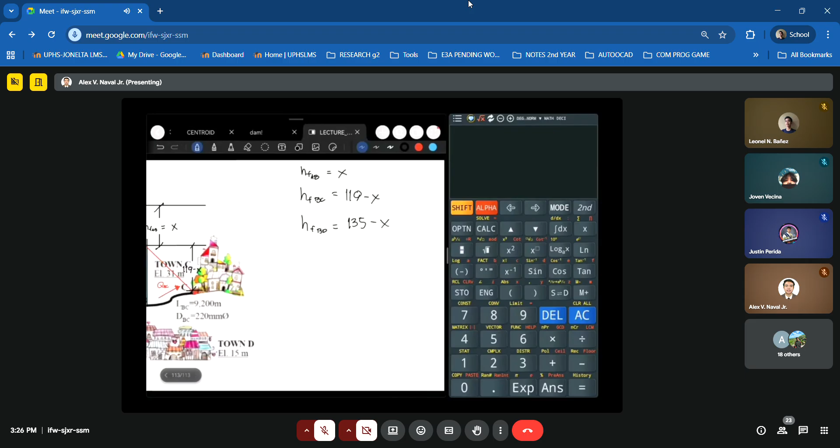So lastly, for the head loss of pipe BD naman, from the junction up to town D, this is 0.0826 times 0.02 times the length of pipe BD, which is 6,100 meters. So 6,100 Q ng pipe BD squared all over diameter ng pipe BD, which is 200 mm or 0.2 raised to 5. Again, let's relate this to our head loss equation earlier. Our HFBD is equal to 135 minus X.

Okay, then after that, dito na lang tayo magpo-focus, di ba, sa relationship naman ng Q at X. So burahin natin si HF dito sa left side natin. Then let's focus dito sa ating equation na natira.

Okay, so again the goal is to express Q in terms of X. So ibig sabihin may iwan sa kaliwa si Q, then the rest nasa kanan na kasama si X.

Okay so QAB, equal yan sa, so again kagaya ng ginawa natin kanina, reciprocal, square root ng reciprocal para mawala yung square sa QAB. So 0.35 raised to 5 all over 0.0826 times 0.02 times 15,000. Then this is our coefficient for the square root of X.

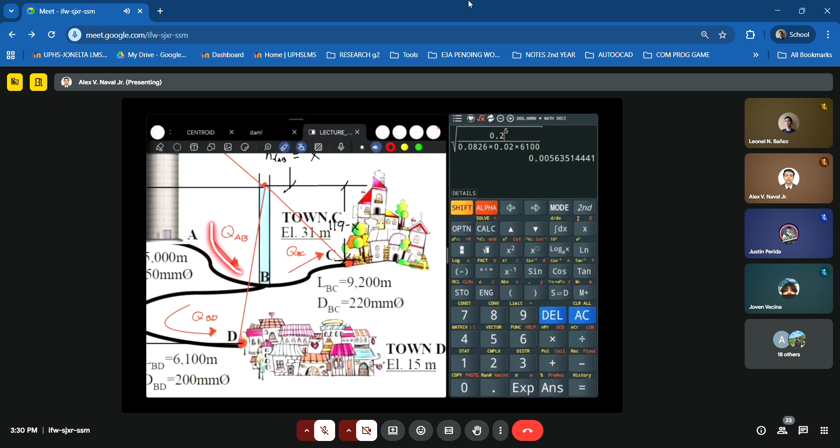135 minus X. Okay, so after we get the relationship of Q and X, dito na lang tayo mag-focus, at saka dun sa equation na mabubuo natin sa continuity equation. So ano yung input ay yung output. So QAB input, output would be BC and BD. So we can express this in an equation. This would be QAB equal yan sa pinagsamang QBC plus QBD.

Okay, so substitute lang natin yung Q na nakuha natin. Ito, lagay mo dito, ito dito, then ito dito. Then shift solve. Again hindi ko na mapapakita yung shift solve dito sa Calcu kasi nga may skill issue ata tong Calcu na to o yung gumagamit lang. Hindi ko pa natitingnan sa settings pero i-calcu nyo na rin on your own habang kinakalcu ko sa cellphone ko.

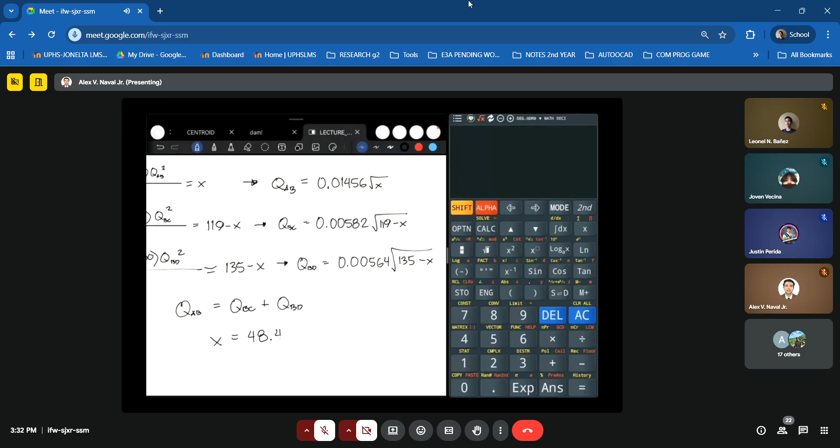So QAB, 0.01456 square root of x, equals 0.00582 times square root ng 119 minus x, plus 0.00564 square root of 135 minus x naman tayo. Okay, so our x is equal to 48.45. So masasolve natin ng x, ang x na nakuha natin ay 48.45 meters. Okay, so after getting that, we can solve for QAB, QBC, and QBD.

Okay so solving this, substitute lang natin. So we have 0.01456 times square root ng x na 48.45. This would be equal sa 0.10135 meter cube per second.

The next, 0.00582 square root ng 119 minus 48.45. So equal yan sa 0.04888 meter cube per second.

Okay so next, 0.00564 square root ng 135 minus 48.45, equal yan sa 0.05247 meter cube per second.

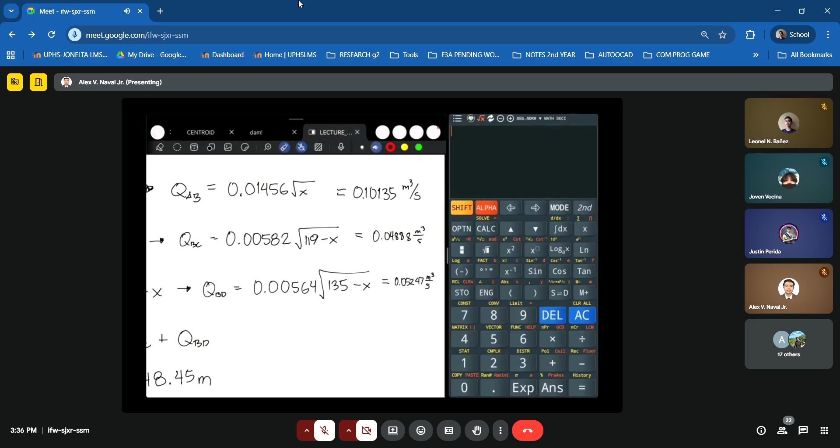Okay so next, let's solve for the actual problem, na pinapadetermine daw yung number of inhabitants sa town C at town D. So, at town C tayo muna.

At town C, the discharge given is QBC, tama ba? So the discharging water is QBC, which is equal to 0.04888 meter cube per second.

Lipat ko lang ito. So the consumption is given as 150 liters per capita per day. So liter per day ang units, mas maganda kung gawin nating liter per day din ang QBC natin. So we have 0.04888 meter cube per second.

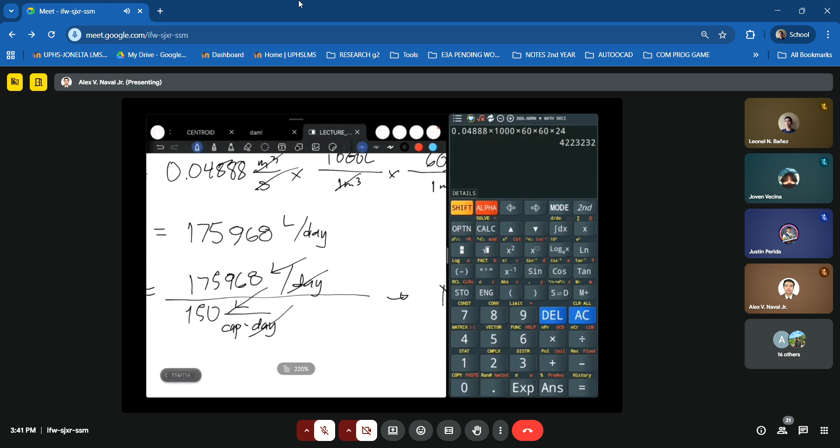So dapat baguhin lang natin ito, correction, this is not yet the final conversion. So equal dapat yan sa 4,223,232 liters per day. Okay so having that, let's divide that by 150. Dalawang 2, 232, nakakalito number. 4,223,232 over 150, so equal yan sa 28,154.88.

So final answer natin for the number of inhabitants at Town C would be 28,155 na, i-round up mo yan, wala namang 0.88 na tao. Okay, so inhabitants ang unit. So final answer.

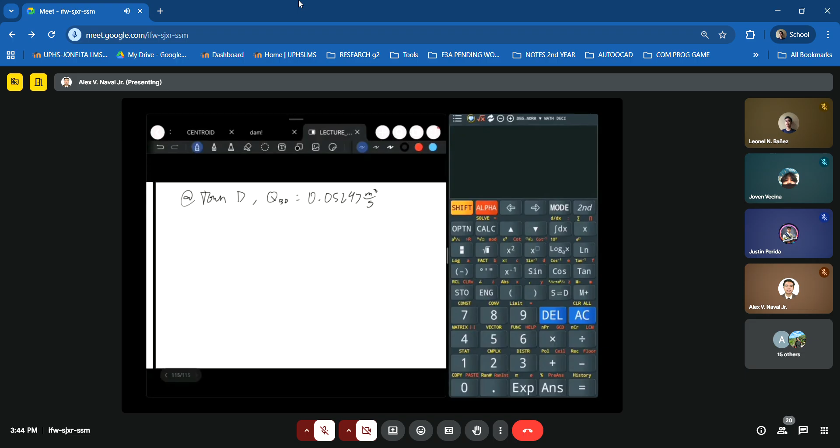I-convert natin yan sa liter per day kagaya ng ginawa natin kanina. So 0.05247 times same factors lang, times 1,000 times 60 times 60 times 24, so equal yan sa 4,533,408 liter per day.

Okay, so let's solve for the number of inhabitants naman for town D. Again let's divide this by the consumption: 4,533,408 liter per day per 150 liter per day per capita. Cancel, then yung capita, since denominator siya, magiging numerator na siya. So solving for the number of inhabitants at town D, equal yan sa 4,533,408 divided by 150, that would be our final answer, 30,223 inhabitants.

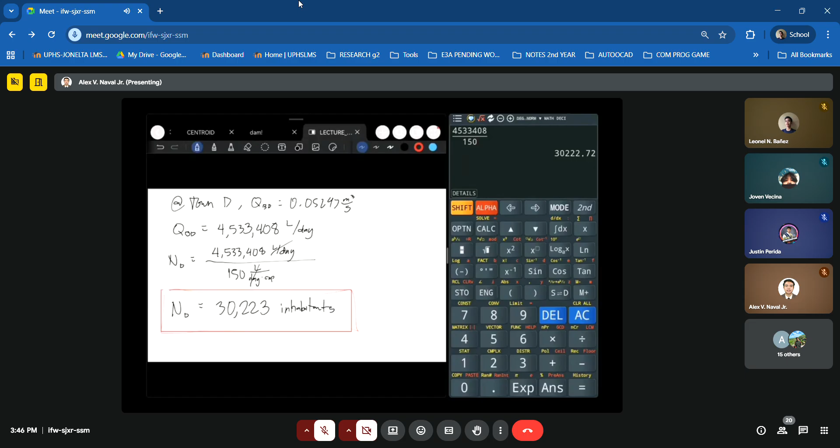Inhabitants sa town D natin. Okay, so final answer for this problem, dalawa yung sagot dito ha, yung number of inhabitants sa town C at sa town D naman. Okay, so that's it, screenshot nyo muna. Simulan natin sa sample problem 1, screenshot. Sample problem, next solution pala. And this one, sample problem 2, then our solution.